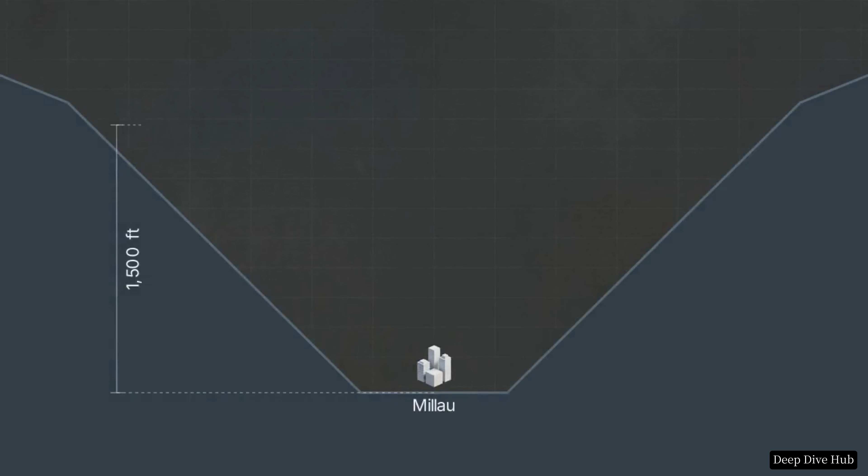In the 1980s, driving from Paris to Spain meant hitting a massive geographical dead end in southern France. Holiday traffic was forced off the highway and down into the Tarn River Valley, a jagged 1,500-foot deep gorge. This topographical map shows exactly why the valley was a nightmare. Vehicles navigated a steep zigzag descent to reach Millau at the bottom, only to crawl back up the other side. This trapped drivers in gridlock for 6 hours.

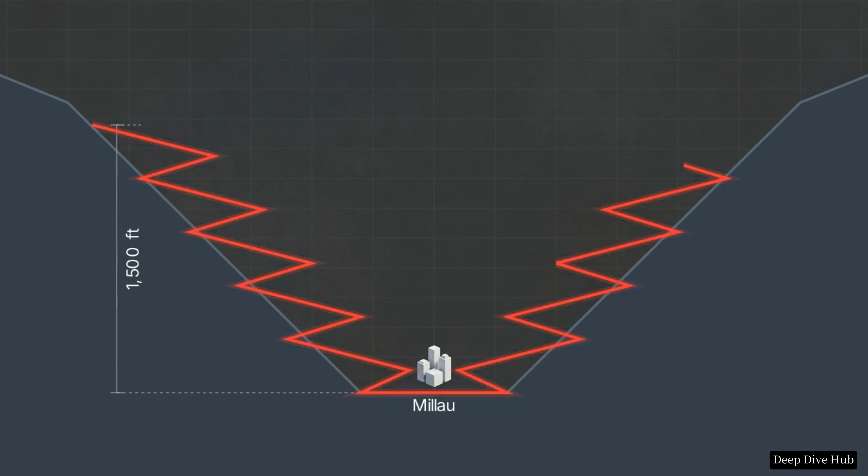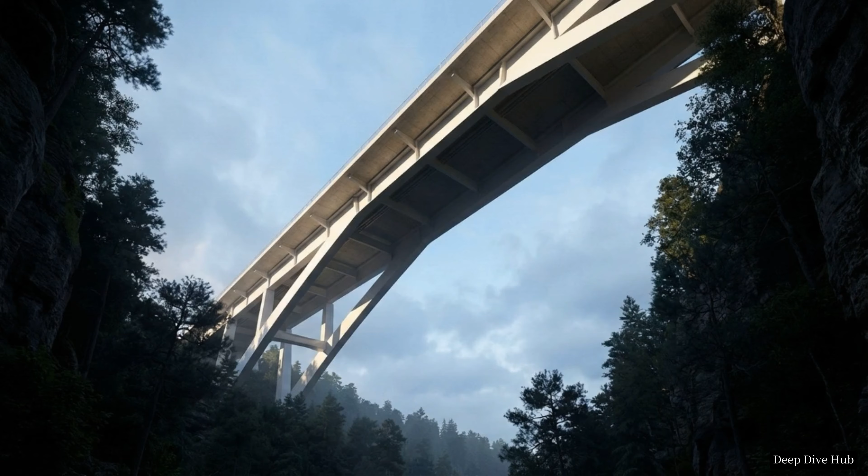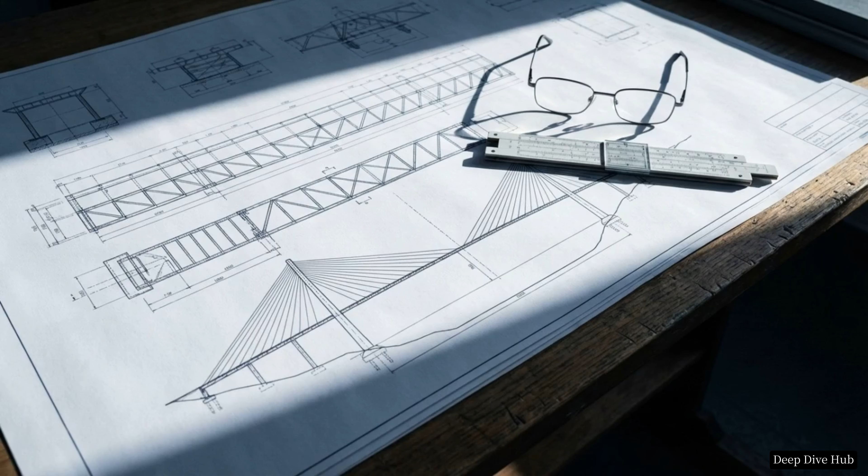required here. Suspending a 4-lane highway at that altitude exposed the structure to devastating crosswinds whipping through the gorge at 130 kilometers per hour. Many engineering experts reviewed the sheer height and extreme weather and concluded the bridge was physically impossible to build, warning that attempting it would invite a catastrophic collapse.

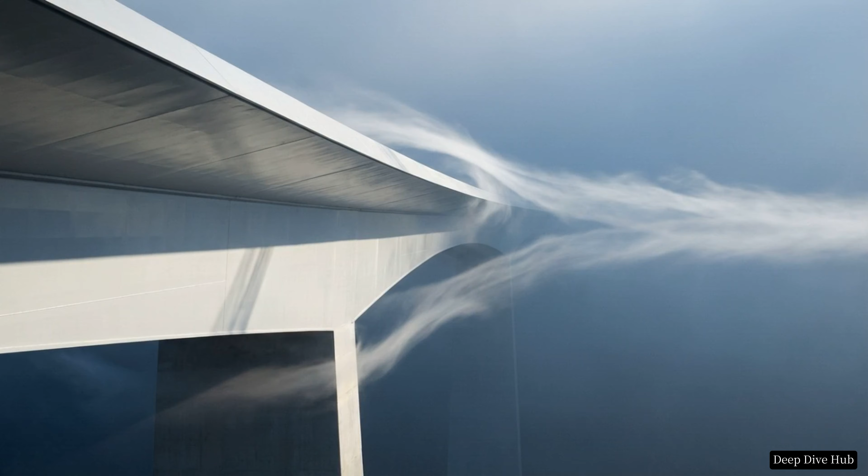The task of designing a structure that could survive these immense forces went to British architect Lord Norman Foster. He drafted a cable-stayed bridge with a remarkably slender profile, intending it to slice through the harsh mountain winds with the delicacy of a butterfly. But Foster's reputation was already hanging by a thread. Just a few years earlier, his highly publicized Millennium Footbridge in London had to be closed shortly after opening because pedestrian foot traffic caused the entire structure to sway violently.

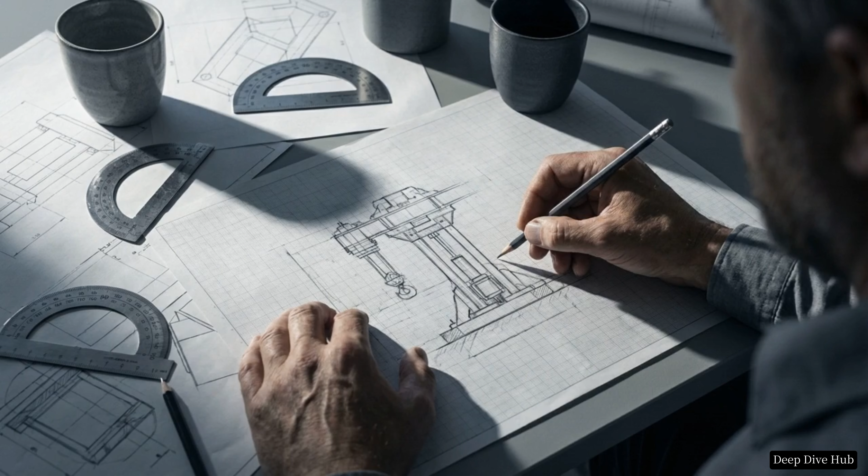Despite the heavy skepticism, in October 2001, a French construction firm agreed to execute his design. They signed a contract with a brutal ultimatum. They had exactly 3 years to build the tallest bridge on Earth. Missing that deadline meant the firm would be hit with a punishing fine of €30,000 for every single day the project ran late. The team was now racing against the clock. They had to invent completely new construction methods to conquer the valley, knowing that the slightest delay would drag them into total financial ruin and professional disgrace.

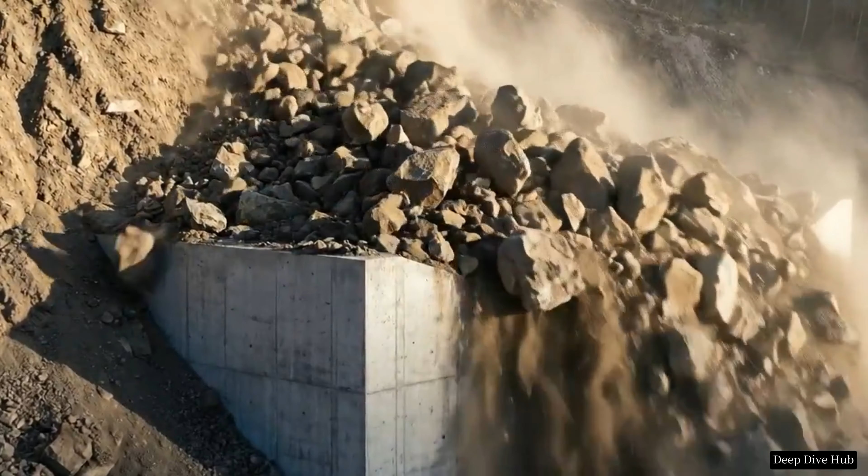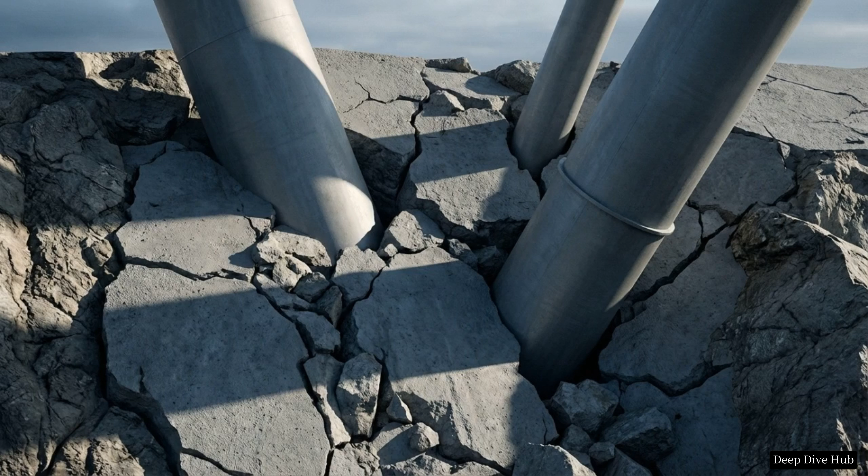The problem started the moment they broke ground. Geologists analyzing the soil discovered that the foundations were sitting on top of fractured limestone, an area heavily riddled with deep, hollow caves. Before they could even address the unstable ground, the earth gave way. A massive landslide tore down the slope and completely buried the excavation site for the very first pillar. Scrambling to save the timeline, the crew performed an emergency intervention. They pumped huge volumes of cement directly into the fractured slope to artificially stabilize the mountainside so digging could resume.

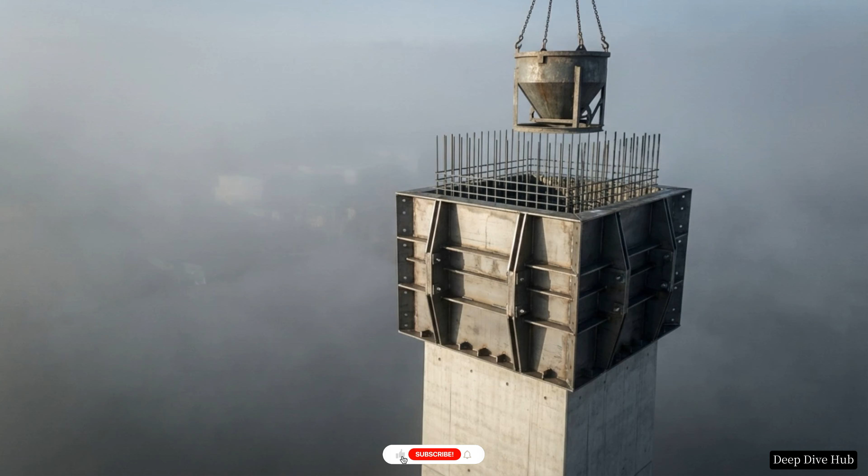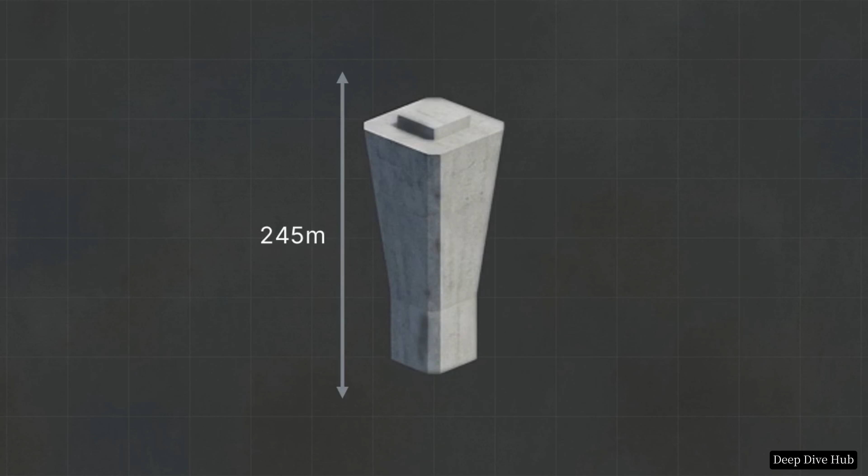Once the bedrock was secure, they began casting the bridge's 7 massive columns. This required pouring 200,000 tons of steel-reinforced concrete into uniquely tapered molds that had to be constantly resized as the pillars climbed higher. This structural diagram illustrates the terrifying geometric trap they faced. Because the tallest pillar would reach 245 meters, even a tiny 10-centimeter misalignment down at the base would magnify into a massive 6-meter gap by the time it reached the top.

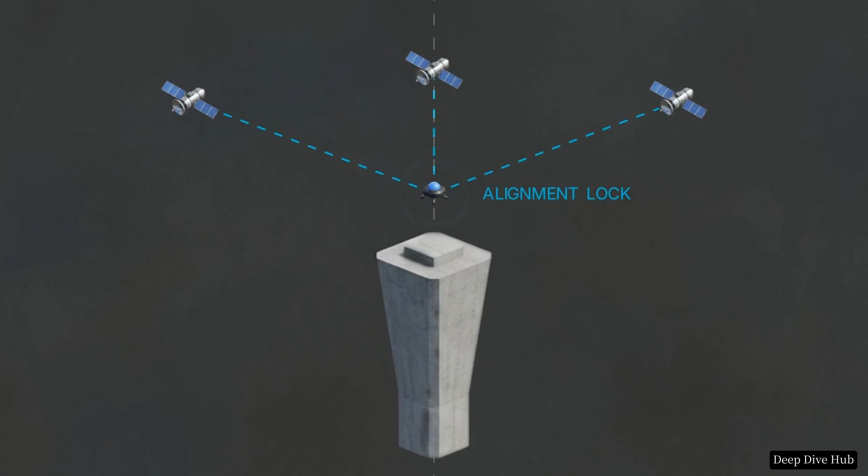To prevent this, the engineers discarded standard surveying tools entirely. Instead, they relied on multi-satellite GPS targeting to perfectly align the 15,000-ton steel casting molds for every single concrete pour. They achieved perfect vertical alignment, but fighting the shifting earth and the constantly changing concrete molds burned critical time. By the time the massive towers were finished, the team was 6 full months behind schedule, pushing them dangerously close to the penalty phase.

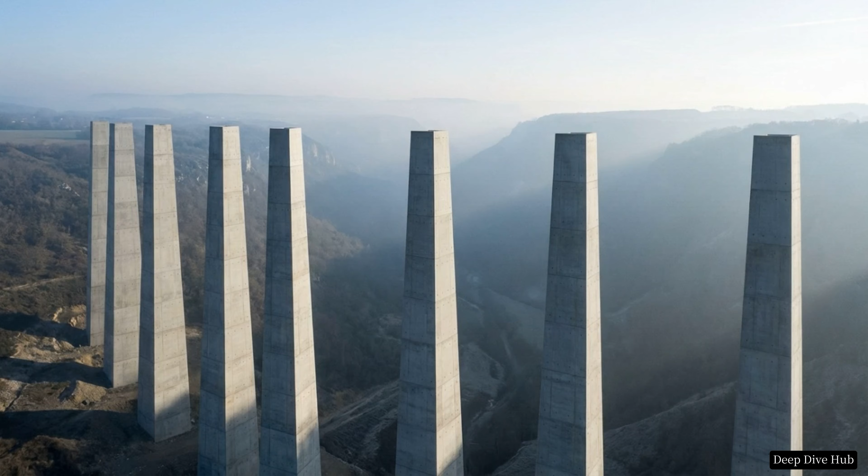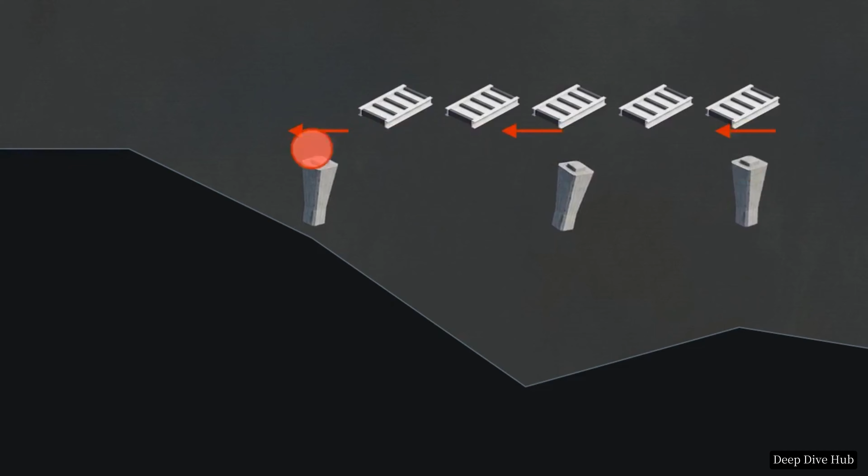By November 2003, the concrete pillars were standing at their final heights. Now the crew had to figure out how to put a 36,000-ton, 2.5-kilometer-long steel highway on top of them. However, traditional bridge building techniques were completely useless here. There was no crane on the planet capable of hoisting 5,000-ton sections of solid steel 800 feet straight up into the air. The standard alternative is pushing the deck horizontally out from the mountainside. But as this animation shows, forcing that much weight horizontally drags against the tops of the pillars. The extreme friction acts like a lever, bending the slender concrete columns inward until they shatter.

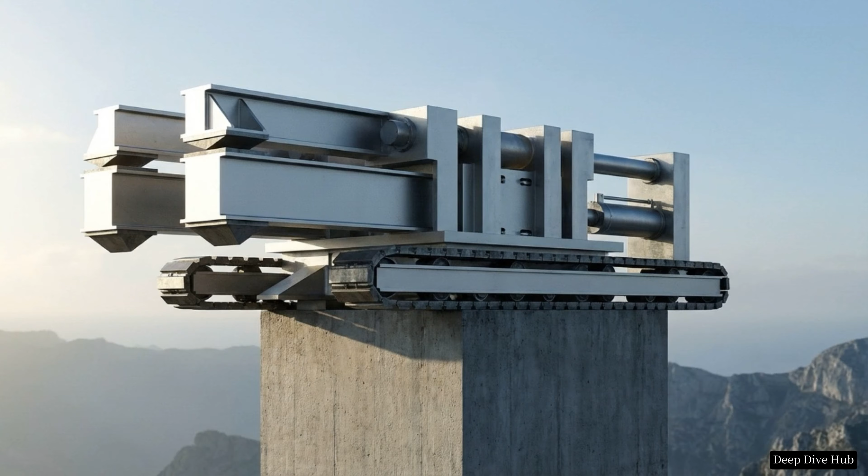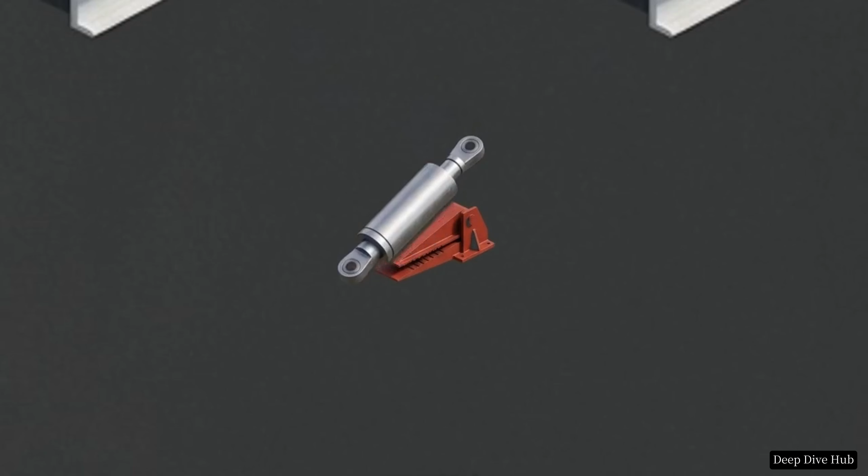To bypass the friction problem, the engineers brought in Eiffel Steelworks. They engineered a completely novel machine, a specialized hydraulic lifting system mounted directly on top of the concrete columns. This shows exactly how the wedges worked. Instead of dragging the steel, the hydraulic rams physically lifted the massive deck off the pillar, pushed it forward in midair, and then carefully set it back down.

But this lift and push sequence had to be executed simultaneously across all 7 pillars. If one hydraulic ram fired even a fraction of a second too late, the uneven distribution of weight would crush a single pillar and bring the entire bridge down. The future of a billion-dollar megastructure now relied entirely on an untested, custom-built system, blindly walking the equivalent weight of 90 commercial airliners over an 800-foot drop.

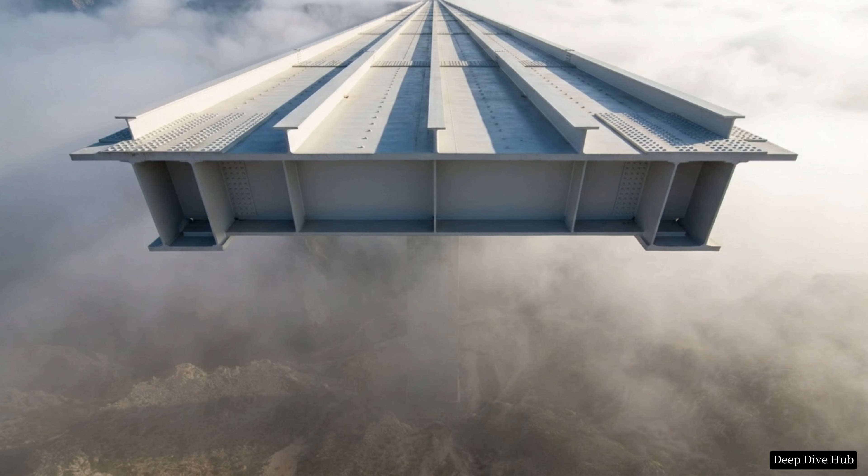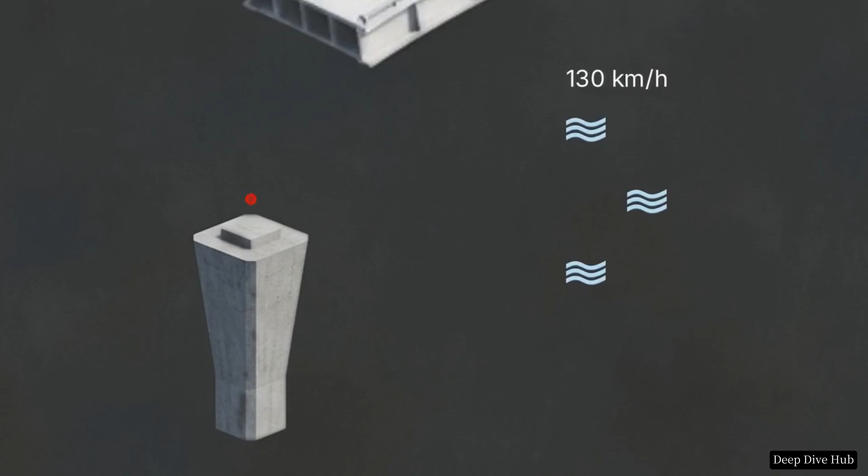Pushing the deck forward was an agonizingly slow process. The operation was strictly limited to days with absolutely pristine weather, as a sudden gust of wind catching the unsupported overhang could easily twist the steel and rip the bridge apart. Inch by inch, the massive steel sections crept out from opposite sides of the valley. Finally, in May 2004, the heavy north and south stretches of the highway met midair directly over the Tarn River. The opposing sections slotted together with a 99.9% rate of accuracy, a flawless connection observed on live television by the French Prime Minister.

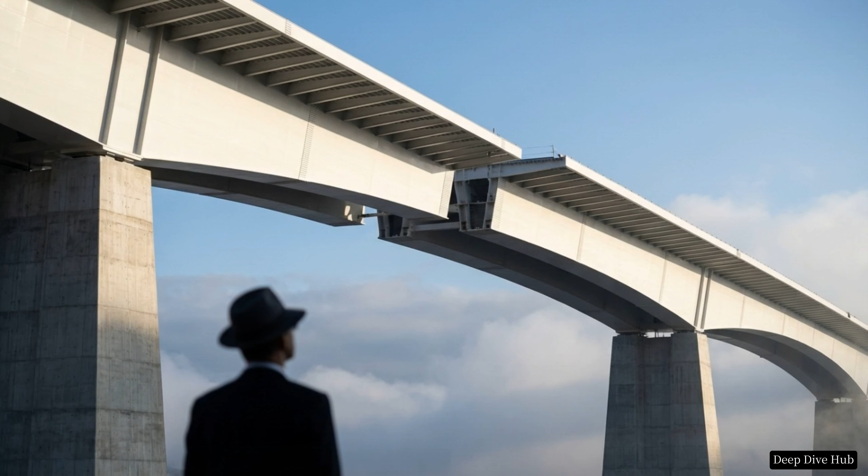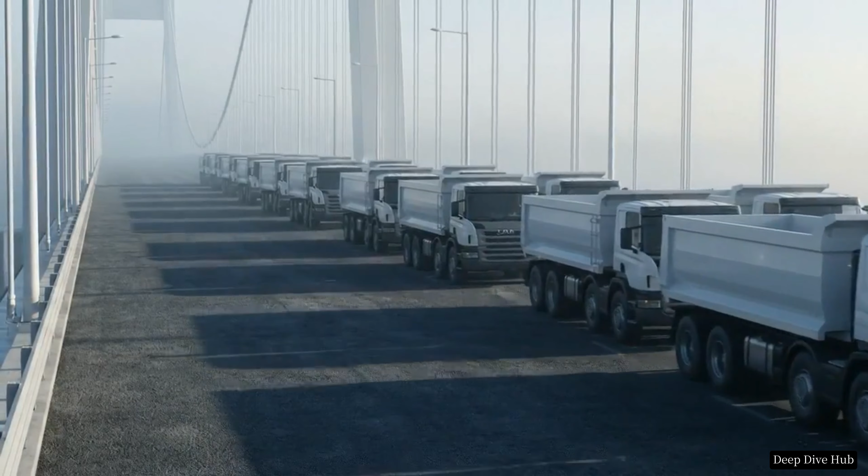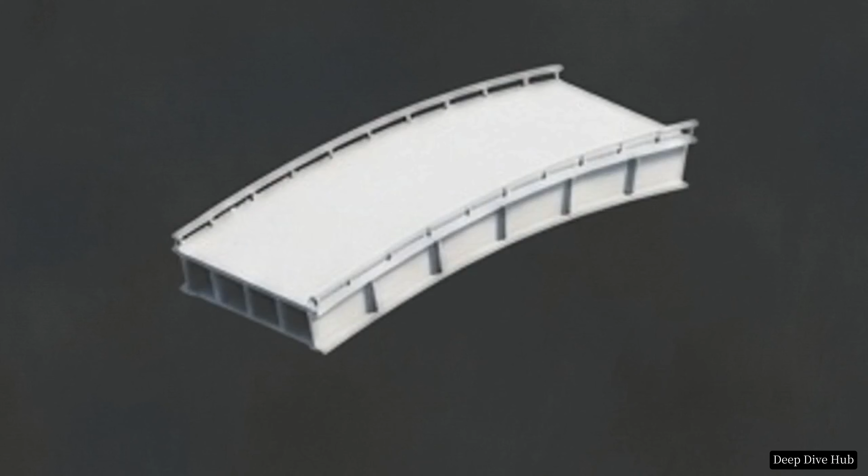With the deck safely locked in, the crew raised 700-ton steel pylons to anchor the upper suspension cables and laid down thousands of tons of heavy asphalt. When finished, the total suspended weight of the roadway hit a staggering 50,000 tons. To prove the design was safe, the engineers parked a tightly packed convoy of 28 heavy industrial trucks directly over a single span. The massive load caused the deck to deflect downward by only 25 centimeters, exactly half of what the bridge was engineered to withstand.

Opening to the public weeks ahead of schedule and entirely dodging the financial penalties, the Millau Viaduct team solved a notorious traffic nightmare. They shattered the known limits of structural engineering to build a permanent 120-year monument that quite literally floats above the clouds.